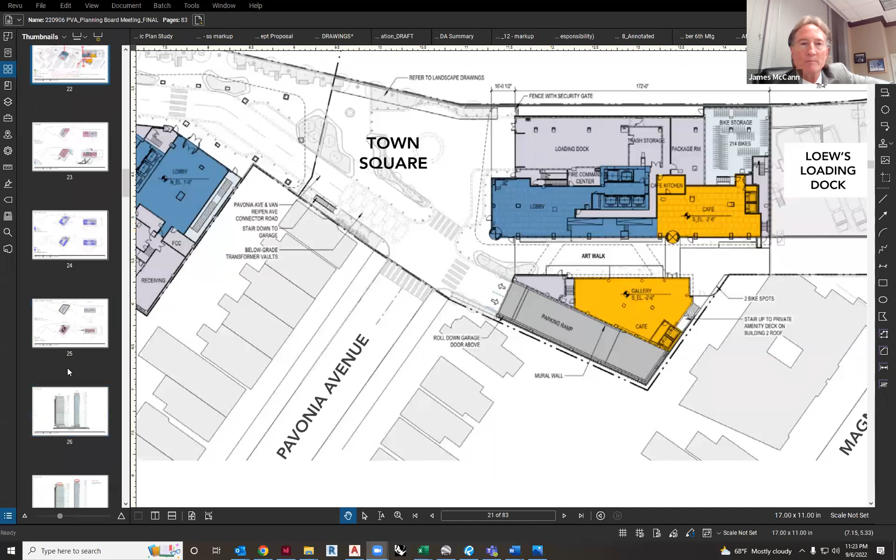Okay, can we just zoom in on this? And Mr. Kutry, I do see your hand up. Just give us one second. I do want to bring you back up to discuss.

So the piece that we're talking about where the little hand on the cursor is, that is the 810 Pavonia piece. For the sake of argument, we're going to call it a 50 by 100 rectangle. The lot line that touches the beige north tower, there is absolutely a fire escape along that property line that comes back into the 810 building 8 feet or whatever that was. So there's at least 8 feet to the property line and then 3 feet to the building.

Tim, if I understand what you're saying, this street that's being shown, if we can move that cursor, that was a connector that was not actually a designated street. And the proposed building at 810, which was approved, was 5 feet off of the proposed street as we see it illustrated here tonight, or no?

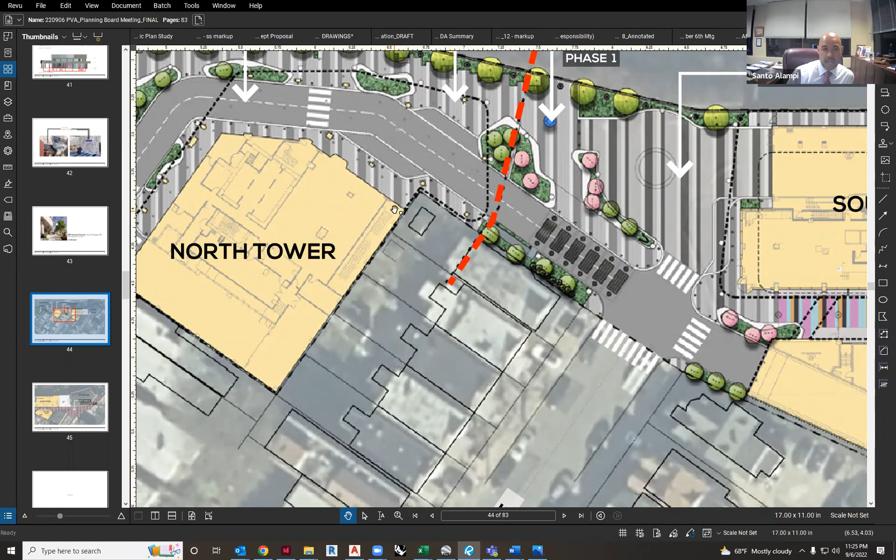It would be 3 feet, 8 inches was the side yard setback. And does that 3 feet, 8 inches then have, is that the dash between the lot line and that dash line? No, it's actually, it was 3 feet, 8 inches off of the property line of 810 Pavonia.

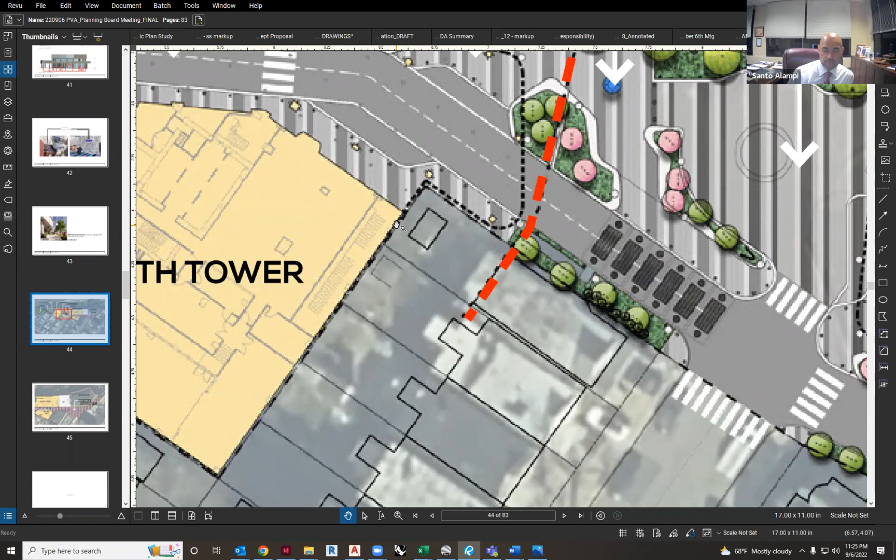My question, Mr. McCann, is that dashed line that we're seeing, which outlines the building of your client's project, do we know the dimension between that and the property line? I can't point. Gary Handel, can you answer council's question? I believe that's 3 feet. We have a clearer image.

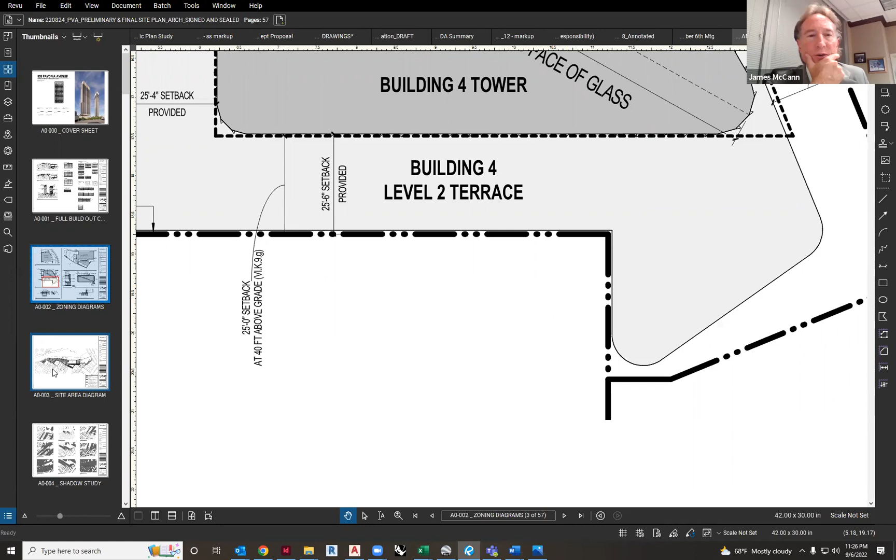Cam, if we still have you on, Chairman, I don't even know what I'm looking at. I don't either. Gary Handel, can you, so this is, Stephen, stick to the plans that we have.

Cam, if you could, let's bring up Mr. Kutry also. Since we're discussing his property, he's online, he can testify to it. Mr. Kutry's been promoted. Thank you.

Hi guys, I'm back. Can you hear me? Mr. Kutry, hold on one second. Let's get to the right screen here. I think council, I think this is probably the best screen. Yeah, but if we could maybe zoom in a little bit. Can I interject here, guys? Just one second, sir. No problem, give us one second. Yep, of course. Sorry guys, go ahead. No worries.

So Tim, it's your recollection that we've got the fire escape on 810. That's 8 feet to the property line. And Mr. McCann's witness has testified that their building is 3 feet off of their property line to the amenity floor.

And then let's talk about this side. So 810 is, there's an alleyway to where? I need to, we're checking on that setback, it may not be 3 feet. We were doing that for just construction, this is not a redevelopment requirement. So we're checking on the actual dimension, as far as the redevelopment plan is concerned, we understood that was a 0 setback condition that would be allowed there. So we're just checking on the actual, what we've actually allowed for there, right in that corner we're discussing. So we're just checking the documents.

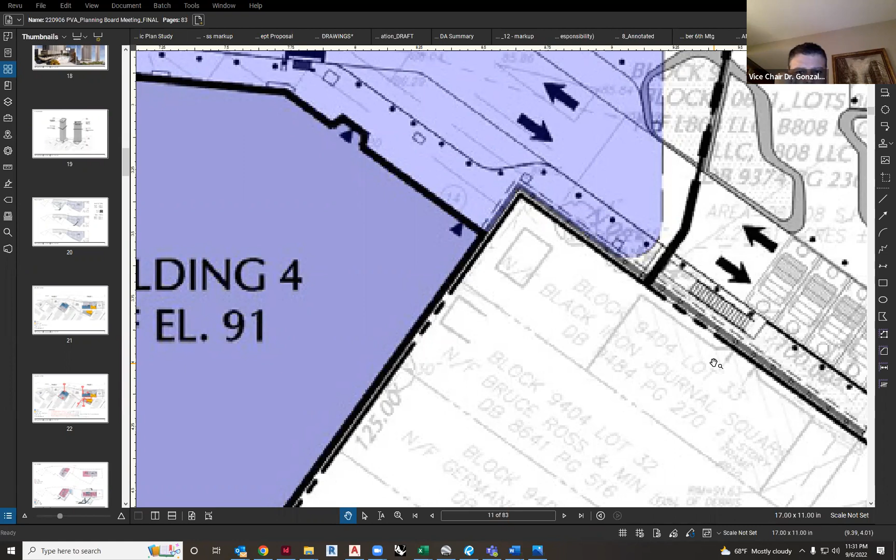And what you were previously approved for. Yes, I have the approval. I may be amending it, and I'm willing to discuss with these guys what they're doing, but as it's proposed, it just isn't going to work.

I mean, they're essentially taking property over the streetway that's being proposed and making it additional building and amenity space. It's not a street, sir. It's basically an internal connecting road on our property. How you were allowed to have windows that are directly on your property line is slightly unfathomable to me. We'll look at the approval, but having legal windows directly abutting somebody else's property is quite unusual and not even legal under almost any building code.

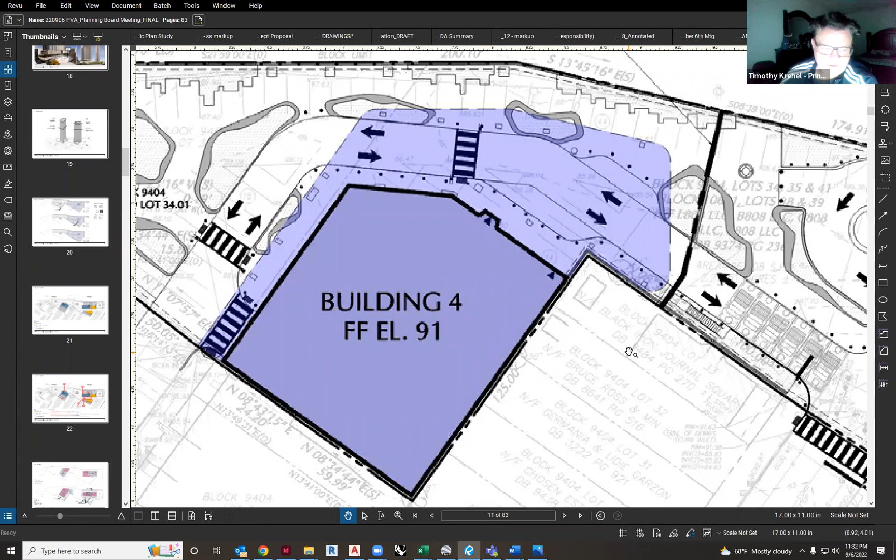So I'm not even sure that this would be approved at the building department in that situation. The side yard setbacks are allowed in that situation because the neighbors are all in that zone. If you go down Pavonia, they're all right on top of each other.

Theoretically, he's building on a building line that has no buildings next to him. He can build up to the lot line because there is no side yard setback. It's like 2 feet on one side, 3 feet on the other. The other person, if they're built on the lot line, he has to hold a 3-foot setback on the other side. So he can technically build to the building line because there's no building next to him.

In this situation, you're building the building next to him after the fact. So the 2060 plan contemplates a building 4 that does not abut out over that roadway. I know you're not calling it a roadway, I'm sorry, the connector road. That's what we used when we got this approval. We literally took map 2 from the 2060 plan and dropped it down, and said our building's going to be a corner lot building here, with a roadway and a sidewalk next to our building once this project happens around us.

The building 4 you're contemplating goes way out further. There's no restriction, and that's the problem we have, is that the earlier vision was indicative, not a plan on what we're planning on building. There's no restriction on us building to that lot line, right? So that's the problem.

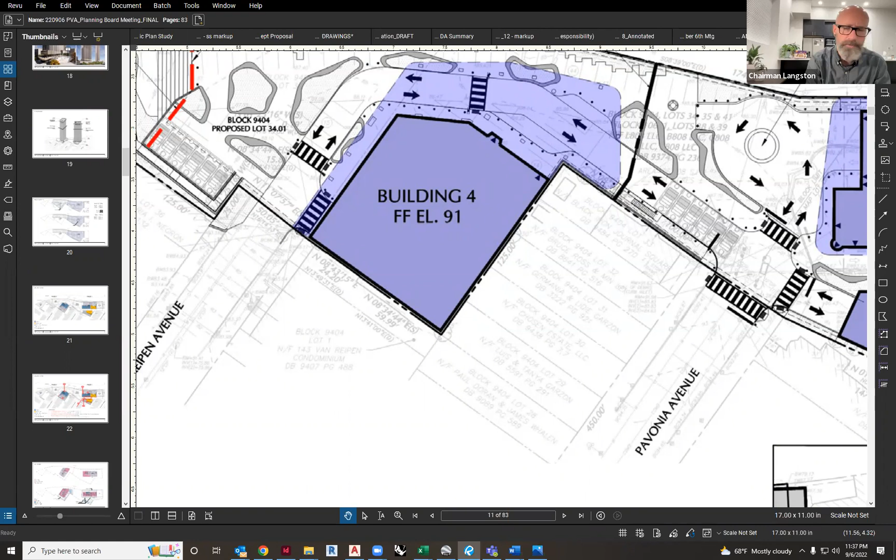Can we stop sharing the screen? I can't even see. I can't see anybody.

I have a suggestion that maybe could end this discussion, at least for the evening, to continue it offline. We'll agree to a condition to meet with the gentleman who owns 810 Pavonia Avenue. We will bring our plans, we will look at his plans together, and we will do what Charles suggested—analyze them both and see if there's a way we can merge them.

And if not, we will report back to planning staff, whether that's Tim or Tanya, whoever we're directed to. We would like 30 days to have that meeting with the gentleman at 810 and take a look at the plans and report back. If we have to amend our plans, or he has to amend his plans, we will figure it out and do our best to cooperate with the gentleman at 810 Pavonia in respect to his plan.

So before we go to Mr. Kutry on that—Santo, what's our legal liability if that's the case, the board's legal liability? This is where counsel probably doesn't agree with me, but I don't know how you can move forward until the question is answered. I just don't know how you are able to move forward. There's a question outstanding as to where the line is and where the building is in relation to the line.